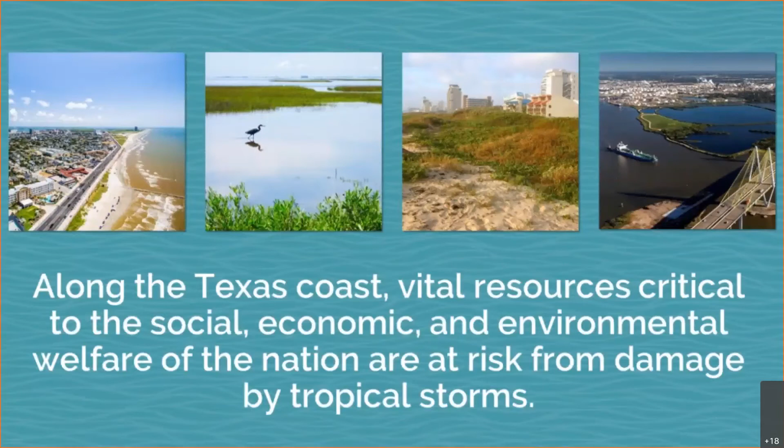Along the Texas coast, vital resources critical to the social, economic, and environmental welfare of the nation are at risk from damage by tropical storms. When tropical disturbances negatively impact the Texas coast, the immediate fallout and the continued aftermath affects not only the people who live in these coastal counties, but also the entire nation. It is critical that we take action now to avoid the destruction that future storms will bring.

That's exactly why the U.S. Army Corps of Engineers has partnered with the Texas General Land Office to identify and recommend feasible projects to reduce risks to public health and the economy, restore critical ecosystems, and to make the Texas coastline more resilient.

The Coastal Texas Study was initiated in 2014 to evaluate large-scale coastal storm risk management and ecosystem restoration actions aimed at providing the coastal communities of Texas with multiple lines of defense from a wide array of coastal hazards. This study falls under the USACE's Civil Works mission, which includes, but is not limited to, inland and coastal flood risk management and restoration, protection, and management of aquatic ecosystems.

The study area consists of the entire Texas Gulf Coast, from the mouth of the Sabine River to the mouth of the Rio Grande, and includes the Gulf and tidal waters, barrier islands, estuaries, coastal wetlands, rivers and streams, and adjacent areas that together make up what we refer to as the Texas coast.

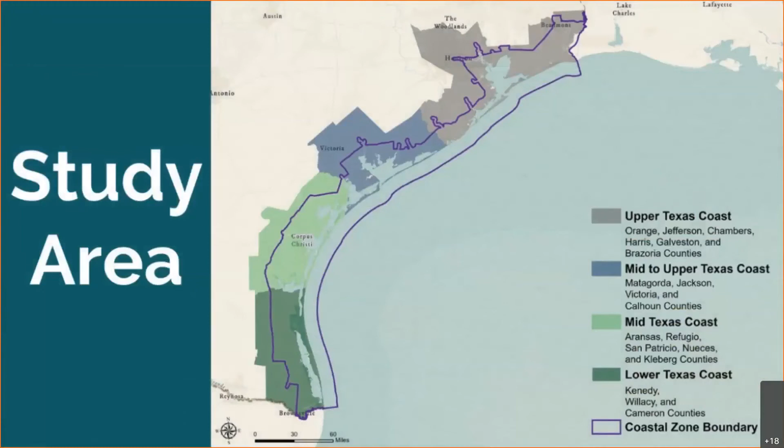In November 2015, the U.S. Army Corps of Engineers entered into an agreement to officially designate the Texas General Land Office as the non-federal sponsor and begin development of a feasibility study and environmental impact statement. The Coastal Texas Study Team was officially formed, comprising the U.S. Army Corps of Engineers and the Texas General Land Office. The study phase, or the phase in which we determine the best course of action to protect the Texas coast, includes a series of reports that explain the findings of the study and a proposed plan of action.

In fall 2018, the study team released the first draft report and the draft environmental impact statement. Based on the input received during the public review and comment period in late 2018 into early 2019, the study team began revising the draft proposal to integrate public comments and feedback. As this second draft proposal was formulated, the study team continued to seek further public input through the establishment of 4 community working groups led by the GLO, as well as a number of targeted stakeholder meetings. In addition, 3 public open houses were held in February 2020 across the Upper Coast to help inform the public.

The study team will continue to review and address the input received from the public and resource agencies to produce the final feasibility report and environmental impact statement, which is anticipated to be published in May of 2021. The final report will be signed by the Chief of the Corps of Engineers in June 2021, which will mark the end of the study phase.

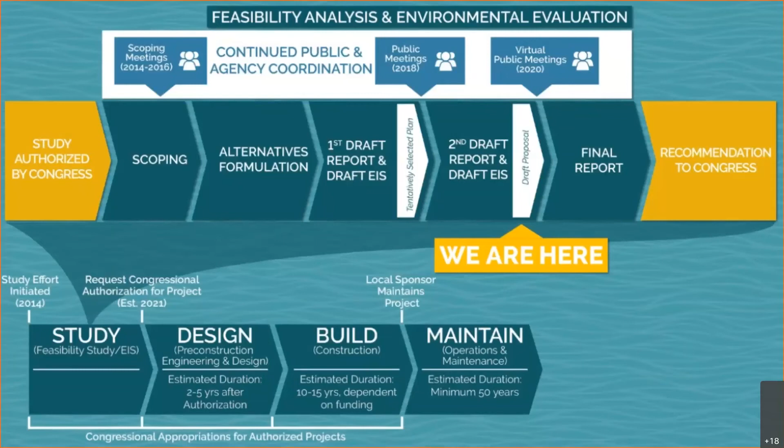After the study phase, the recommended plan will be proposed for congressional authorization and funding. If approved and funded by Congress, the recommended plan would then be designed and constructed over a period of 12 to 20 years, depending on congressional authorization, appropriations, and non-federal partnerships. The project would be maintained after construction by a local sponsor or sponsors who have not yet been determined.

To comply with the National Environmental Policy Act, or NEPA, a federal agency must prepare an environmental impact statement if it is proposing actions that may significantly affect the quality of the natural and human environment. The NEPA environmental review process seeks to facilitate better informed decisions focused on avoiding, minimizing, and/or mitigating potentially negative impacts

of federal action. For the Coastal Texas study, the U.S. Army Corps of Engineers is following a tiered NEPA process. The final EIS will be published with the final feasibility report in 2021, and supplemental NEPA compliance documents will be prepared and published for public review as the project is designed. This means that the public will have additional opportunities to engage with the team, review revised plans, and provide feedback.

In accordance with U.S. Army Corps of Engineers planning guidelines and NEPA requirements, a proactive approach was taken to engage the public, resource agencies, industry, local governments, and other interested parties throughout the Coastal Texas study planning process. This included regular and continued coordination over the study period. Starting in 2014, during the reconnaissance phase, a series of scoping meetings were held. And now a series of virtual public meetings are being held to review and finalize the second draft proposal and

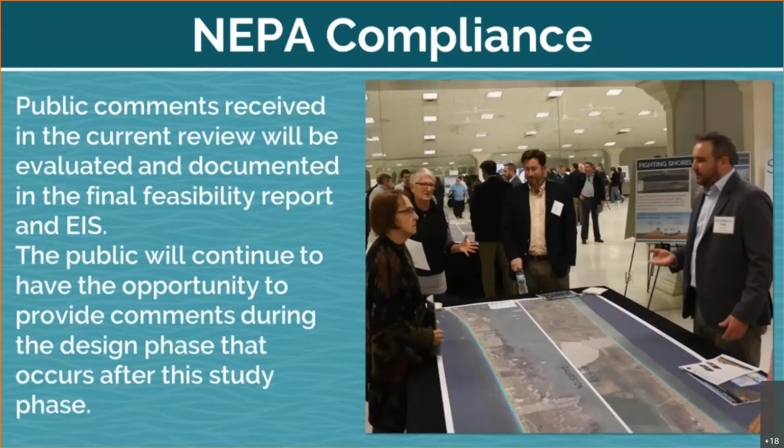The Texas coast is vulnerable to tropical storms and hurricanes that can take human lives, flood homes and businesses, and damage coastal ecosystems. The damages from hurricanes and tropical storms could become more severe as storm surge is projected to increase with higher sea levels and rising ocean temperatures. When tropical disturbances negatively impact the Texas coast, they affect not only the people who live in these coastal counties, but the entire nation. The Texas coast is an economic engine, home to ports, oil and gas refineries, corporate headquarters, military bases, fuel supply and refinery complexes, and numerous other enterprises.

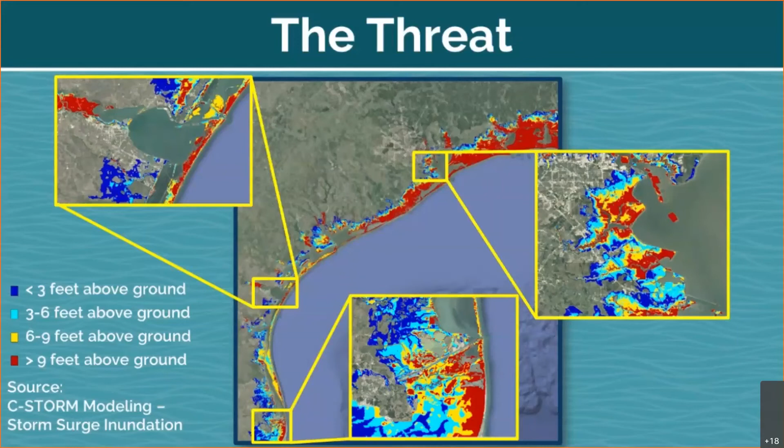The shutdown of even a single Texas port can impact state and national economies for a significant period of time, as experienced in 2008, when Hurricane Ike's storm surge and heavy winds significantly impacted Brazoria, Chambers, Galveston, Harris, Jefferson, and Orange counties.

The Coastal Texas Study Team recognizes that the natural physical features and processes are interconnected with the man-made features within the coastal Texas region. Population and industry grew in this region specifically because these features supported economic growth. However, erosion and storm surge reduced the protection these barrier systems provide to the coast. Relative sea level change increases the vulnerability of these systems even further. Risk reduction measures designed to sustain natural features and reduce inundation and erosion risks can be achieved at lower cost when implemented before conditions deteriorate further.

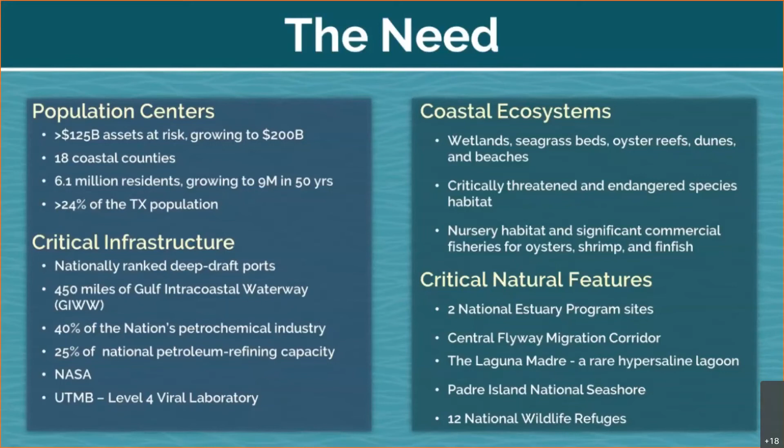After the first draft proposal was released in October of 2018 for public comment, policy review, and agency technical review, multiple changes were considered and developed to reduce impacts and costs of the revised plan. Most significantly, the plan no longer includes the originally proposed levee floodwall segments that would have paralleled State Highway 87 on Bolivar Peninsula and FM 3005 on Galveston Island. These segments were dropped from the plan to minimize both social and environmental impacts. Instead, the draft proposal now includes the Bolivar and West Galveston Beach and Dune system, a double dune system designed to provide both storm surge risk reduction and ecosystem restoration benefits.

Among other changes at the Bolivar Roads crossing, a second 60-foot deep navigation channel and two 650-foot wide draft sector gates are now proposed instead of a 1,200-foot wide gate. The estimated refinements of the Bolivar Roads gate system have reduced the constriction of flow between the bay and Gulf down from 27.5% to 7 to 10%. This, in turn, has reduced the anticipated environmental impacts to the Galveston Bay's ecosystems and has reduced the amount of mitigation now necessary to offset losses.

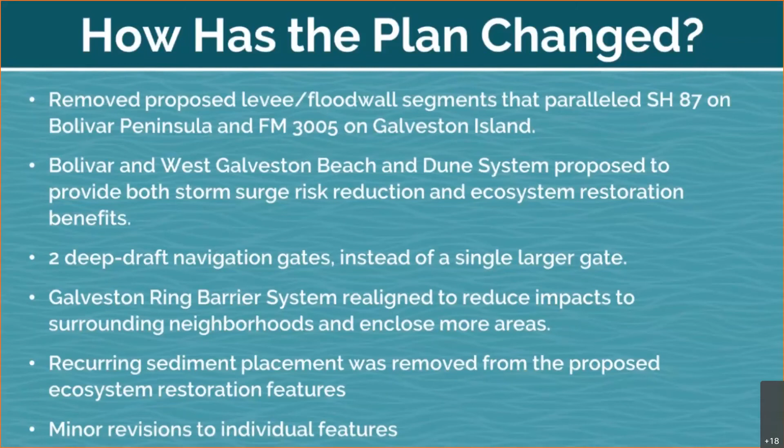This time, we've developed a broader, more holistic solution that combines man-made solutions with coastal restoration projects that work together to protect the coast. This comprehensive approach is referred to as a multiple lines of defense strategy and can be divided into three categories. The Gulf line of defense to keep storm surge in the Gulf, which includes the Bolivar Roads storm surge gate system, which has been designed to prevent approximately 60% of storm surge from entering Galveston Bay, highlighting the need to implement the gate system prior to the remaining proposed features.

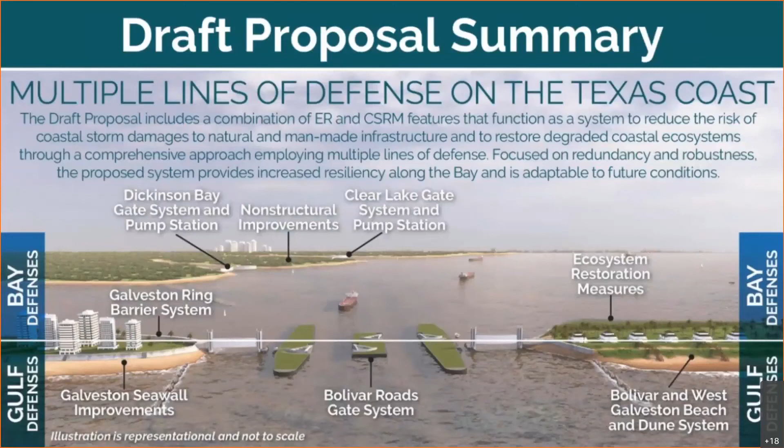The Bay line of defense to manage water that is already in the bay and any additional storm surge that overtops the Gulf line of defense, and ecosystem restoration to enhance coastal resilience into the future. The proposed plan provides increased resiliency along the coast and is adaptable to future conditions, including relative sea level change.

As we mentioned, the Gulf defense now includes a gate system across the Bolivar Roads inlet and 43 miles of beach and dune systems on the front of the peninsula and the island, as well as 2.9 miles of beach and dune structure down on South Padre Island. The Bay defense includes a 15-mile ring barrier around the backside of Galveston Island and mainland defenses including gates and stations at Dickinson Bay, Clear Lake, as well as non-structural measures on the west side of Galveston Bay. And the ecosystem restoration proposal includes 8 separate sites totaling over 6,600 acres of habitat restoration coast-wide.

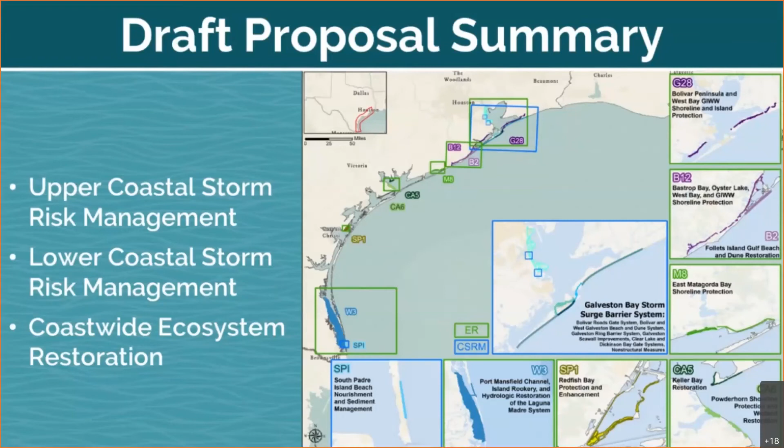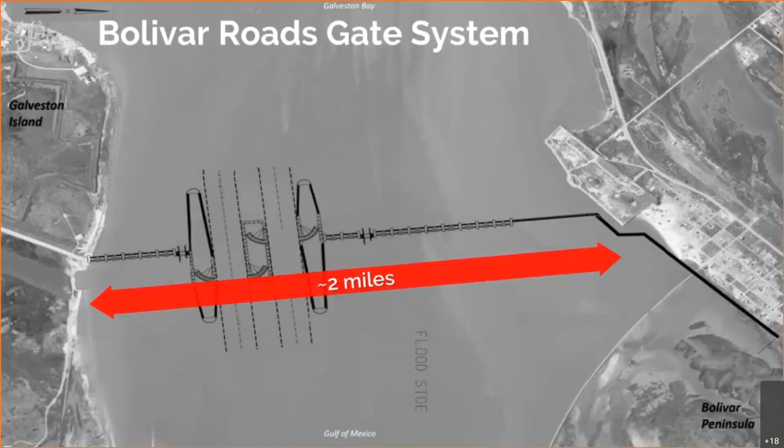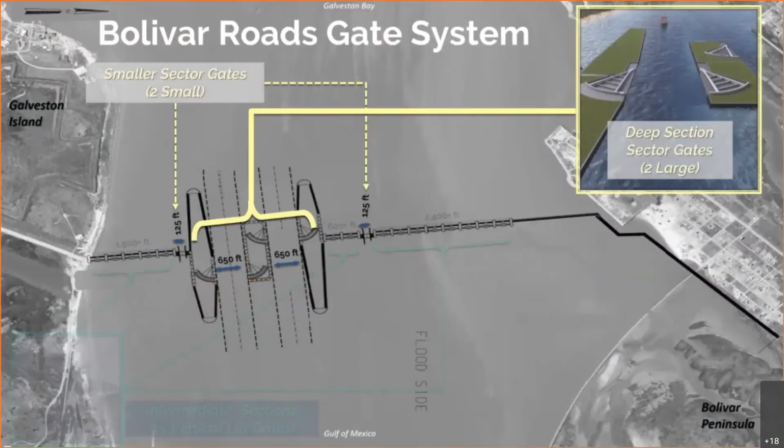The study team hosted an international storm surge gate design workshop with experts from around the world to evaluate the previously proposed gate design and suggested changes to improve safety, assure redundancy, and reduce environmental impacts. The Bolivar Roads gate system represents the most critical feature of the Gulf line of defense and now includes two 650-foot wide floating sector gates, two 125-foot wide floating sector gates, 15 300-foot wide vertical lift gates, 16 shallow water environmental gate complexes that are 16 feet by 16 feet, and tie-in structures comprising of flood walls and levees will join the gate system to the beach and dune system.

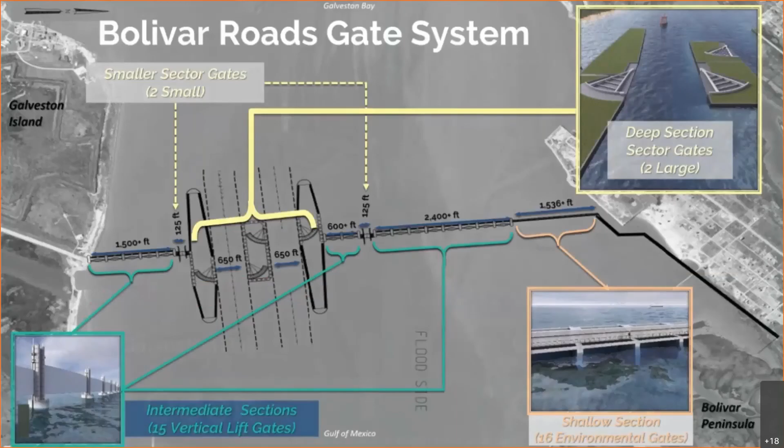The deep draft navigation sector gates across Bolivar Roads inlet will be anchored and housed in man-made islands on both sides of the existing and new channels. The gates will be stored in dry docks within the man-made islands, which will help minimize the probability of vessel impacts during day-to-day activities. As a storm approaches and a decision is made to deploy the gates, the dry docks will be flooded, allowing the gates to swing out and float into place. Then water will be pumped into the arms, sinking them into place. Once the storm surge event has passed, the water will be pumped out of the gates and they will be floated back into their dry docks on the artificial islands.

The deep draft navigation gate openings will require dredging a second deep draft channel and are designed to be 650 feet wide each, with a sill depth of 60 feet. The sill depth across the ship channel will allow for future deepening of the Houston ship channel, which is currently maintained at a depth of minus 48 feet mean lower low water. The gates will remain open year-round to maintain continuous navigation traffic. The gates will only be closed when a storm surge event threatens the Texas coast or for an annual maintenance check and inspection.

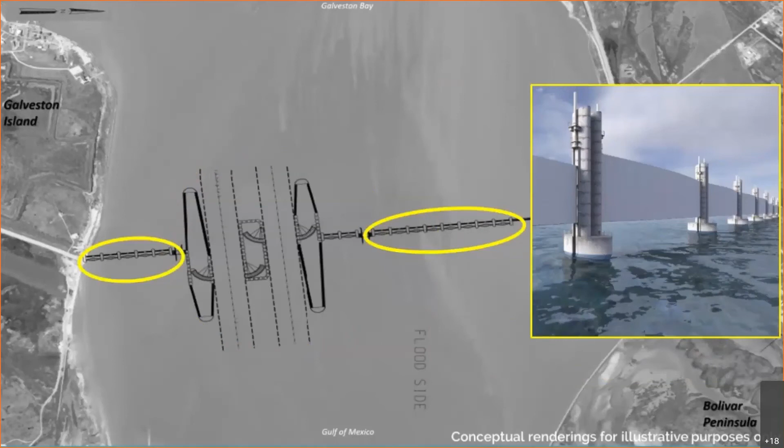Smaller 125-foot sector gates will be located on each side of the larger 650-foot sector gates for other vessels to travel through the storm surge gate system without crossing paths with the deep draft vessels. These sector gate complexes will have a reinforced concrete pile foundation with steel fabricated gates. When the gates are open, they are stored on the islands to protect them. The channel crossing continues with a series of vertical lift gates suspended between concrete towers. The lift gates for the Bolivar Roads crossing have 300-foot wide openings, including 8 lift gates with a 20-foot sill depth and 7 lift gates with a 40-foot sill depth.

To the right or north of the vertical lift gates, we propose to build 16 shallow water environmental gates in the area nearest Bolivar Peninsula, where the water is 5 feet deep or less. These gated structures provide multiple openings to allow for tidal passages from both sides of the gates. The gates will require an access road on the bay side of the structure to allow maintenance crews access to the gates and operating equipment.

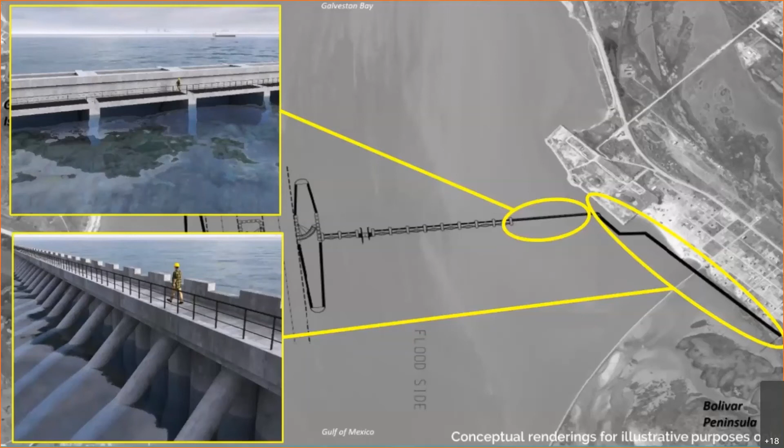The road will consist of stainless steel industrial grating, which will allow sunlight to pass through the water below, which reduces impact to marine life. To tie the gated structures to the land, a 5,300-foot-long combi wall will join the system to the levee system at the end.

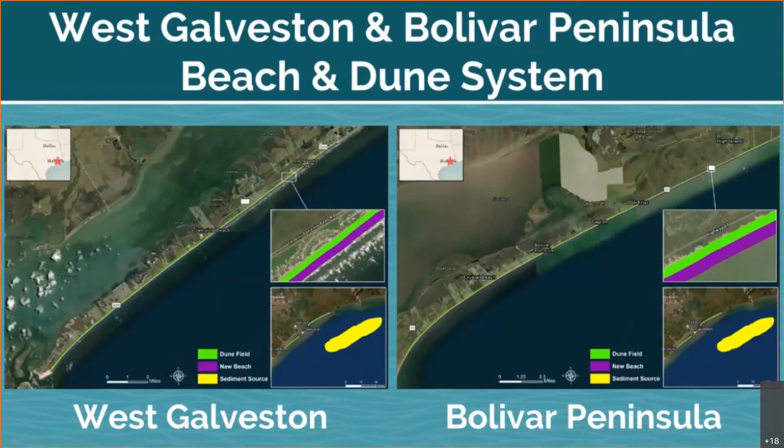Beach and dune construction on West Galveston Island and Bolivar Peninsula form the remainder of the Gulf defenses. On West Galveston Island, this feature would tie into the existing Galveston seawall and continue westerly for 18 miles, ending at San Luis Pass. On Bolivar Peninsula, the beach and dunes tie into the McFaddin National Wildlife Refuge Beach Ridge Restoration Project, which starts approximately 2 miles east of Highway 87 and continues southwest for 25 miles to the end of Biscayne Beach Road, where it links into the gates levee feature.

Although the improved beach and dune designs provide a lower level of risk reduction than the previously proposed levee system, they take advantage of the natural resiliency of sand systems, sustain the barrier island over time, and strengthen the tie-in to the Bolivar Roads gate system. These changes have been made in response to public comments and represent a solution which minimizes environmental and social impacts while still achieving significant coastal risk reduction.

The proposed beach and dune features include a 14-foot landward dune and a 12-foot gulfward dune with a 250-foot wide beach system on the water side. It is important to note that this dune field construction will begin at the current dune line and build out toward the water rather than building toward people's residences.

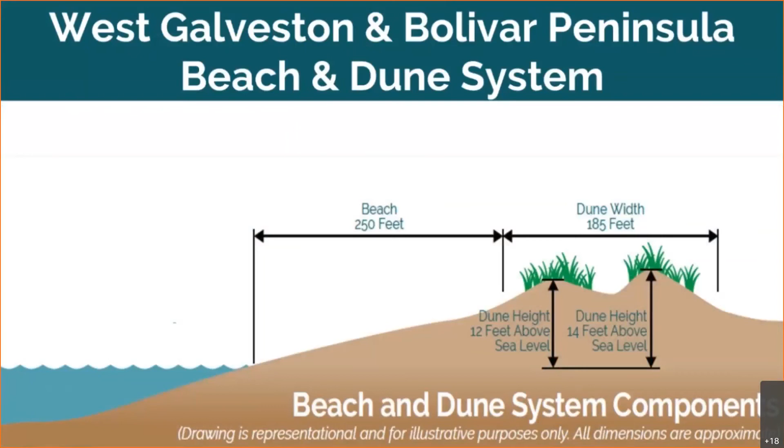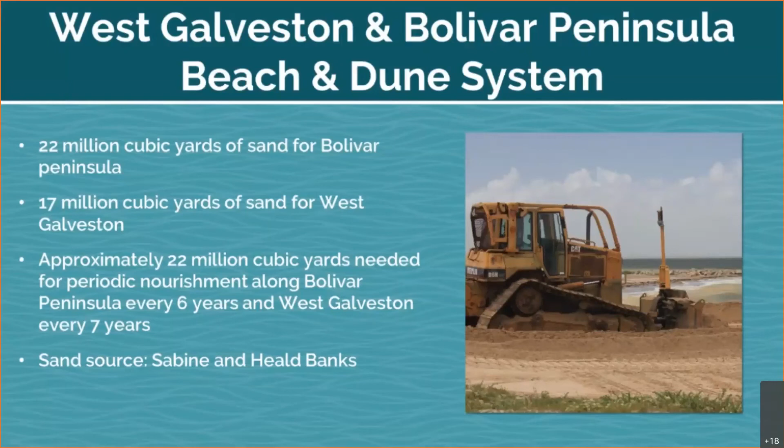The draft proposal will require approximately 22 million cubic yards of sand for initial beach and dune construction along Bolivar Peninsula, and approximately 17 million cubic yards of sand for initial beach and dune construction along West Galveston, and approximately 22 million cubic yards of material will be needed for periodic nourishment along Bolivar Peninsula and West Galveston, every 6 years for Bolivar and every 7 years for West Galveston over a 50-year period of analysis, considering the intermediate relative sea level change condition.

Currently, there are 125 authorized beach access points, 67 vehicle crossings, and 58 pedestrian crossings within the proposed beach and dune systems. Existing authorized pedestrian beach access crossings will be replaced with dune walkovers to minimize impacts from the newly created dune systems. Pedestrian traffic volume will be investigated to determine an appropriate walkover width for the location, and all up and down ramps for the crossovers would be designed to be ADA compliant.

Existing authorized pedestrian beach access crossings will be replaced with dune walkovers to minimize impacts from the newly created dune systems. Vehicular ramps will be created to minimize ramp length. The number of access points will be in compliance with the Texas Open Beaches Act.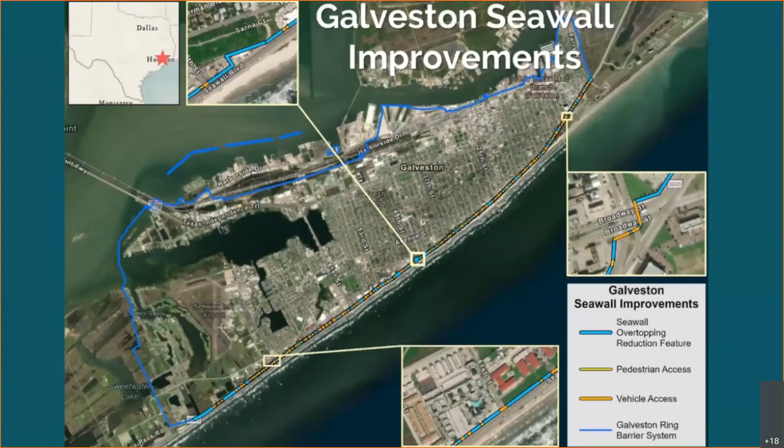The Galveston Bay is a large enough body of water that flooding can result from wind and fetch pushing water up onto Galveston Island from the backside. The Galveston Ring Barrier offers the first component of the bay defenses to address this risk.

The system ties into the existing seawall and proceeds clockwise from the west end of the seawall north in the proximity of 103rd Street to Offatts Bayou, crosses the Teichman Point area, and ties into Interstate Highway 45, continues east along the Harborside area to the 47th Street area, then continues north to the Galveston Ship Channel, then continues east through the Port of Galveston to the University of Texas Medical Branch, turns northward to the ferry, and then back south to the seawall. Numerous trade-offs between project cost, project impacts, and overall effectiveness of the ring barrier system were evaluated and made during the refinement of the alignment.

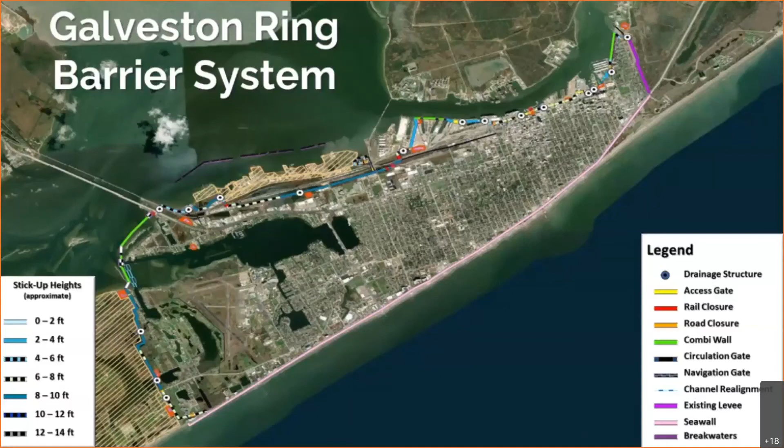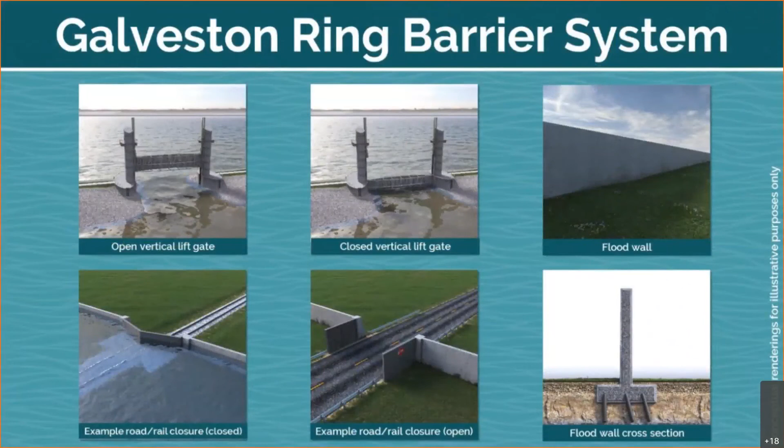The ring's floodwalls and gates have been set at an elevation of 14 feet, which considers the water level of the bay and wave overtopping, assuming that the Bolivar Roads gate system has been constructed in advance of a storm.

Since Galveston Island currently operates on a gravity drainage system, the plan would add a forced drainage system consisting of approximately 6 new pump stations to move water off the island. The pump stations would address storm surge flooding as well as rainfall flooding during storm events. Further, any features proposed by the study are not permitted to worsen any existing conditions, meaning the risk of flooding from a rain event cannot be increased with the implementation of the ring barrier system.

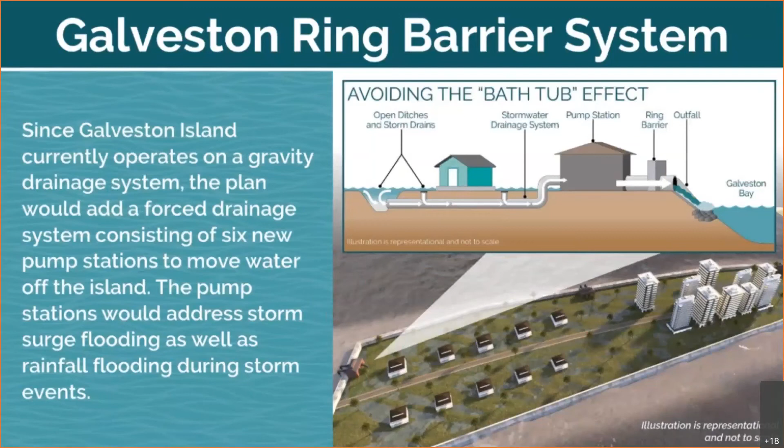Although the Bolivar Roads gate system reduces the storm surge water of the Gulf from entering Galveston Bay, residual risk exists due to the storms pushing the Galveston Bay waters onto the mainland. The Clear Lake and Dickinson Bay systems are proposed as a second line of defense to address this concern. The Clear Lake and Dickinson Bay gate systems each consist of a storm surge gate structure, associated flood walls, and a pump station to address the residual risk that persists in the Clear Lake and Dickinson Bayou areas.

For Clear Lake, a closure is proposed at State Highway 146 in Clear Lake to address Galveston Bay surge. The design includes a 75-foot sector gate and a pump station with a design capacity of 20,000 cubic feet per second. The flood wall and closure structure would start on the west side of State Highway 146 near NASA Road 1 and end on the south side of the outlet near Marina Bay Drive west of State Highway 146.

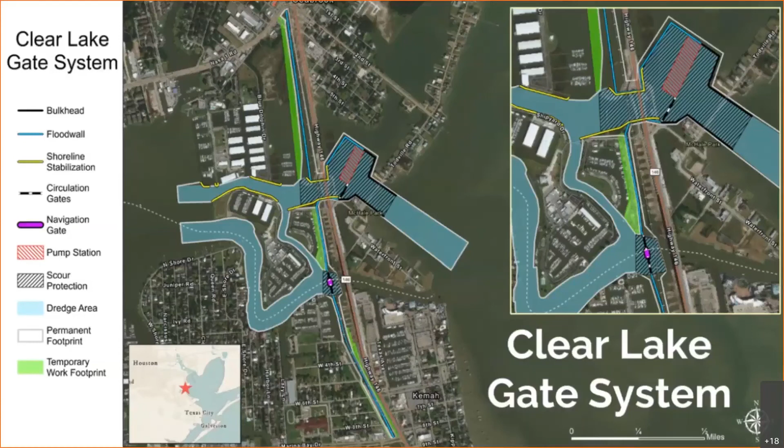For Dickinson Bay, a closure is proposed at State Highway 146 and Dickinson Bayou to address Galveston Bay surge. The design includes a 100-foot sector gate with a design capacity of 19,500 cubic feet per second. The flood wall and closure structure would start on the west side of State Highway 146 near Avenue T and end on the south side of the bayou near Waterman's Harbor west of State Highway 146. These features would include drainage outlet structures, also called circulation gates, to allow hydraulic connectivity to be maintained except during closure for hurricane or tropical storm surge events.

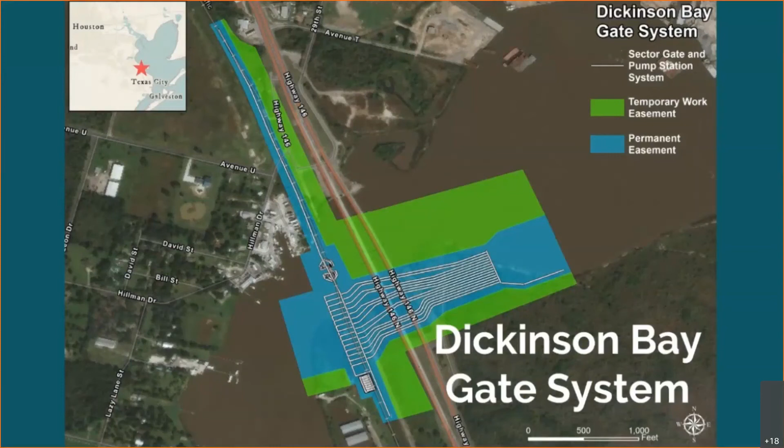Non-structural measures are proposed for the west side of Galveston Bay, north of the Texas City Hurricane Protection Levees. Non-structural measures include raising houses and/or floodproofing. The study team reviewed residential and non-residential structures within the Galveston Bay system that are predicted to sustain significant damage during a variety of storm surge flood events under the future with project condition with the surge barrier in place. Based on an evaluation of cost and benefits and the ability to continue to buy down risk, structures still receiving damages in the 100-year storm surge event were recommended for voluntary non-structural raisings.

About 1,750 residential pier and slab-on-grade homes are being recommended to be raised to the future with project 100-year stage plus 1 foot, and 170 non-residential slab foundation buildings are recommended to be floodproofed to 3 feet above the existing ground elevation. If local floodplain standards are higher than these recommended elevations, the local standard should be followed.

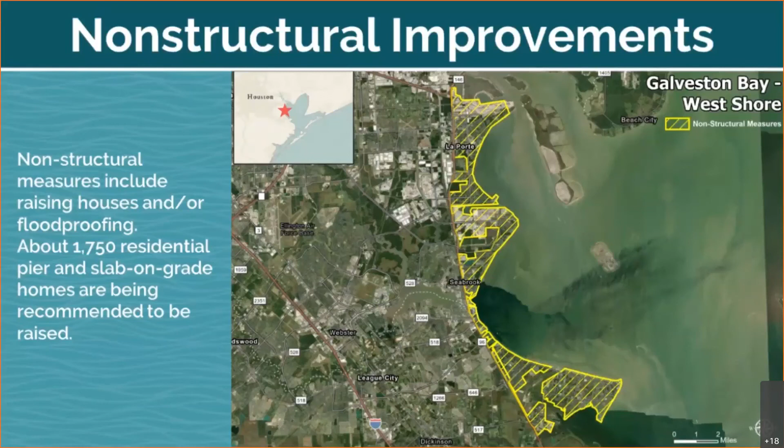The Coast-Wide Ecosystem Restoration Plan was formulated to restore degraded ecosystems that buffer communities and industry on the Texas coast from erosion, sinking land, and storm losses. Ecosystem restoration projects address habitat loss and degradation from coastal processes and support the coastal storm risk management components by providing a natural buffer from coastal storms. Each ecosystem restoration measure represents a combination of features and is formulated in a specific geographic location to restore diverse habitats and provide multiple lines of defense.

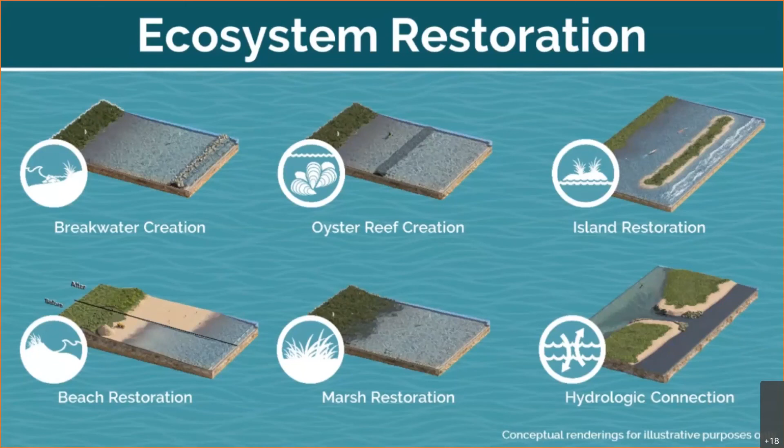A total of 8 ecosystem restoration measures are proposed along the entire Texas coast that collectively provide approximately 6,610 acres of ecosystem restoration. Ecosystem restoration measures included in the draft proposal include 114 miles of breakwaters, 15.2 miles of bird rookery islands, 2,052 acres of marsh, 12.3 miles of oyster reef, and 19.5 miles of beach and dune. Here, you can see the proposed measures for Galveston Gulf Intracoastal Waterway shoreline and island protection.

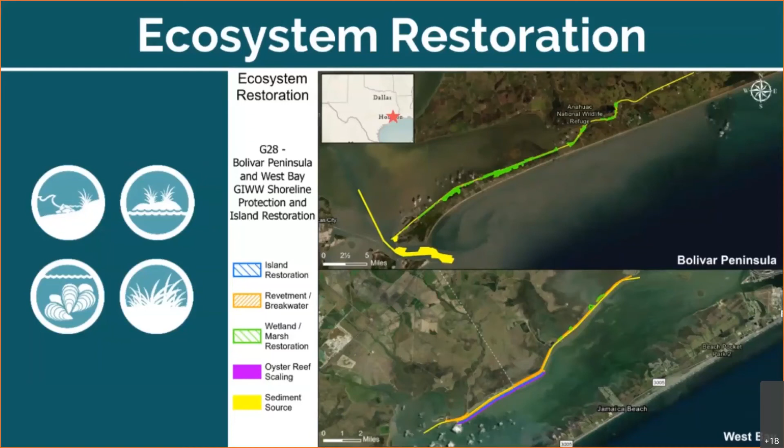Here, you can see the proposed measures for Bolivar Peninsula and West Bay Gulf Intracoastal Waterway shoreline protection and island restoration. You can also see proposed measures for Follett's Island, Gulf Beach, and Dune restoration.

Here, you can see the proposed measures for East Matagorda Bay shoreline protection and Keller Bay restoration. Oyster reefs, revetment, and breakwaters will reduce erosion along the shorelines, and sediment will be used to restore marshes, wetlands, and islands.

Here, you can see the proposed measures for Powderhorn shoreline protection and wetland restoration, and Redfish Bay protection and enhancement. Again, offshore breakwaters and oyster reefs will reduce erosion of the shorelines, and sediment will be used to restore marshes, wetlands, and islands.

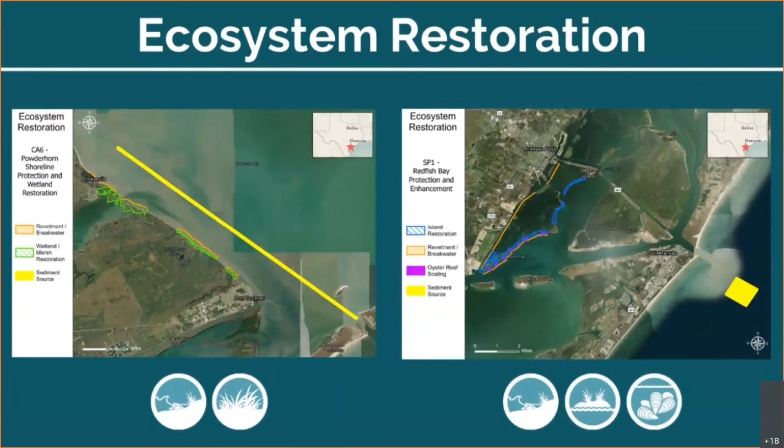Finally, here are the proposed measures for Port Mansfield Channel, island rookery, and hydrologic restoration of the Laguna Madre. Sediment will be dredged from the channel and placed on the beach in Mansfield Island, a bird rookery island. The opened channel will restore the connection between the Gulf and the lagoon.

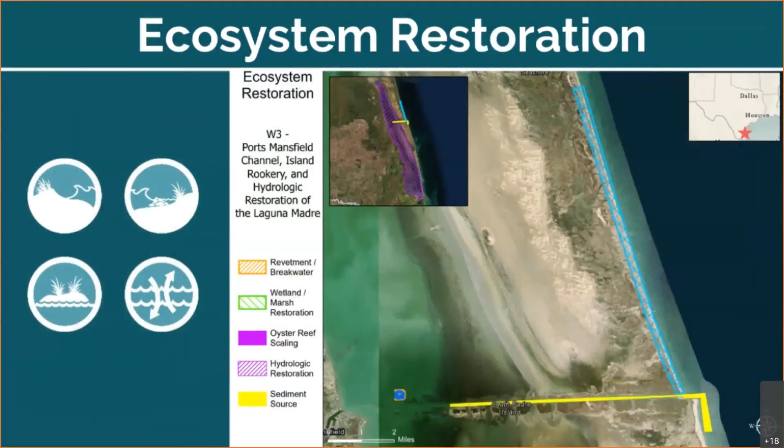While the team was able to minimize and avoid many potential impacts by optimizing the proposed lands, an estimated 1,577.6 acres of direct and indirect impacts to wetlands, bay bottom, and oyster reefs are still anticipated under the draft proposal. The impacts are divided into two categories, direct and indirect. Direct impacts are caused by the footprint of coastal storm risk management feature construction, and indirect impacts are caused by construction-induced changes to the environment that are not within the direct footprint.

A draft mitigation plan has been developed to address the potential lost functions and values of the impacted areas through the creation or restoration of habitats in the area. Over 677 acres of habitat will be created, and an additional 674.4 acres of existing low-quality habitat will be enhanced to offset potential direct and indirect impacts to wetland and oyster reefs under the draft proposal.

Potential locations for mitigation sites have been developed by the study team, but will be refined further during the pre-construction engineering and design phase. Ultimately, the final size of the mitigation measures may change. However, due to the conservative nature of engineering and economic assumptions used in the development of the draft proposal, it is anticipated that design refinements of the proposed structures will result in equal or lesser environmental impacts than currently estimated.

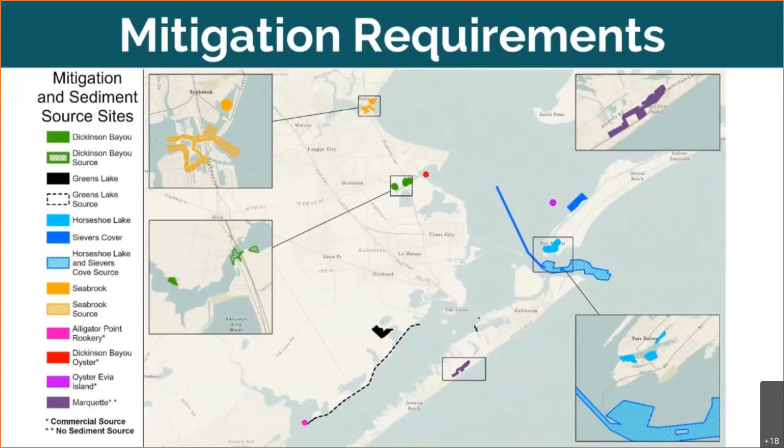For the overall combined project, the project construction cost is estimated at $26.2 billion, with 67% of the cost allocated for Gulf defenses, 23% for bay defenses, and 10% for ecosystem restoration. As you may notice, the total economic recovery costs from previous storms indicate that the proposed project could very well pay for itself in just one storm.

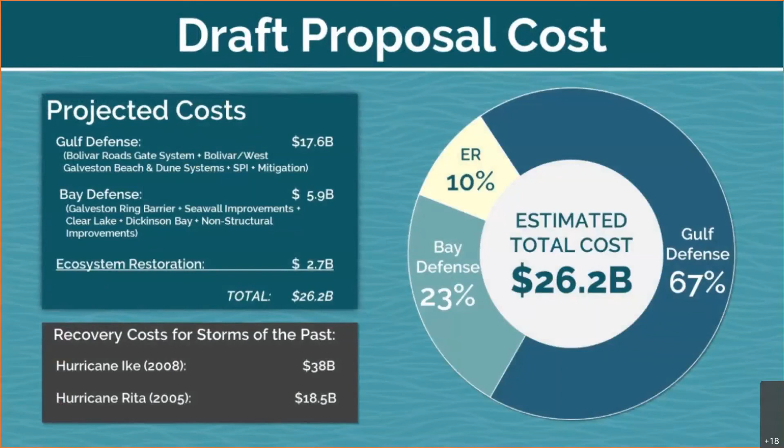With the draft proposal in place, not all storm damages will be prevented, only reduced. It is important to understand that the project will not eliminate all risks to life and property. Even with primary line of Gulf defenses and secondary line bay defenses, residual damages can still occur from project exceedance events, rainfall events, and hurricane winds and wind-blown debris.

Implementing the coast-wide ecosystem restoration plan would result in positive effects on natural resources which are institutionally, technically, and publicly recognized. Restoration supports the global, national, state, and locally significant resources within the area and the unique services, functions, and values provided by these resources. Fresh, intermediate, brackish, and saline marshes will be protected or enhanced within a framework of marsh restoration, shoreline protection stabilization, and dune beach features that interact to provide benefits greater than their costs.

Together, these features would help protect against erosion and provide important transitional estuarine habitat between upland and marine environments. Restoring lost wetlands, protecting existing wetlands, and reducing the profound environmental and habitat loss across the study area could also help support the coastal storm risk management portions of the recommendations.

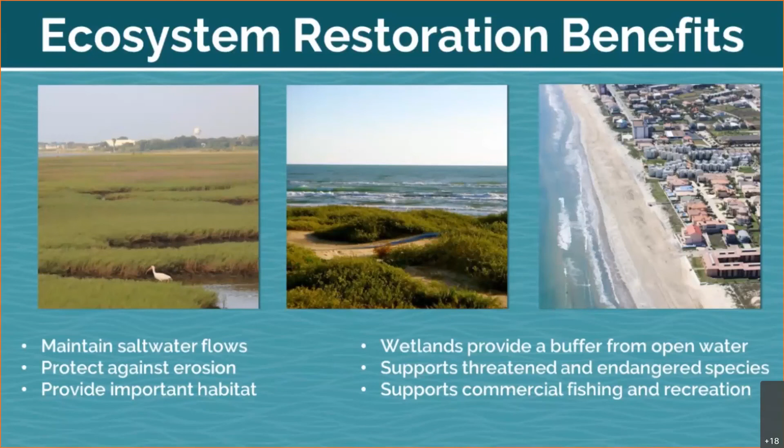Implementing the Galveston Bay Storm Surge Barrier System to reduce financial damages from hurricane storm surge in the study area serves multiple purposes. First, it would help lessen the financial and social impacts that tropical storms and hurricanes can cause by reducing the risk of property damage that displaces residents, shuts down commercial and industrial services, and disrupts livelihoods. If structures avoid or experience less damage because of the draft proposal, families and businesses can rebound much more quickly

after a tropical event. Second, time, money, and energy would not be lost to repairing structures damaged by storm surge, relocating to other areas due to displacement from a home or business, or disruptions in community cohesiveness. The draft proposal would also help to ensure that the economy and the region's critical infrastructure would continue to operate after a storm, and the stress and hardship associated with a hurricane storm surge would be decreased.

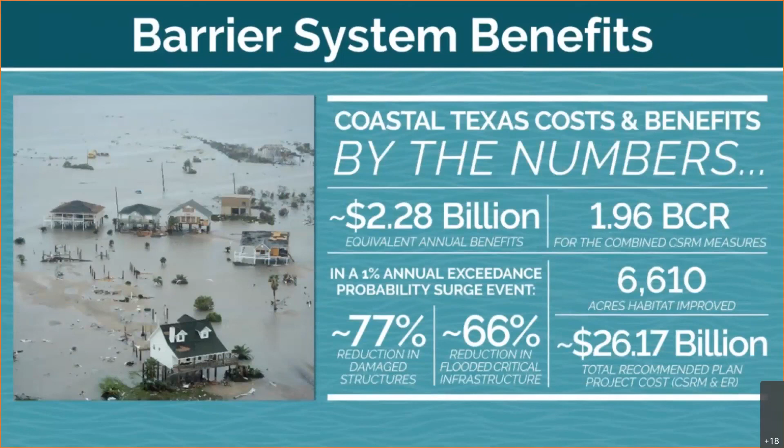And most critically, if damages from storms were distributed equally across all 50 years of the study, the Galveston Bay Storm Surge Barrier System is anticipated to reduce average annual damages by $2.28 billion per year. That concludes the presentation portion of today's meeting.

We will now begin the commenting period. As a reminder, if you have not registered to speak during the meeting today and would like to, you may do so at any time by using the Raise Hand feature located at the bottom of the WebEx participant list, or dialing *3 if you are joining us only by phone. Due to the nature of today's virtual meeting, the formal public commenting portion of today's meeting will be conducted in the following way. First, federal, state, and local elected officials who wish to speak will be called on to do so. Then, anyone else who has indicated a desire to speak will be given the same opportunity.

We will then call on each member of the public who has signed up to speak by the name used during the meeting registration or by the last 4 digits of your phone number if you are only joining us by phone. Each speaker will be given 2 minutes to make their comments. A countdown timer will be displayed on the meeting broadcast screen for each speaker to indicate the remaining time. As your time ends, please be courteous to the other members of the public who wish to provide comments and quickly wrap up your comments to ensure that everyone who would like to speak has the opportunity to do so.

If you do not need the entire time allotted, help us to include everybody by only using the time you need. If you complete your comments in less than 2 minutes, we will restart the clock for the next speaker. Remaining time cannot be reserved or transferred to another speaker. Please keep in mind that we reserve the right to mute your microphone if this instruction is not followed. We ask that you support us in conducting a respectful, orderly, and courteous meeting. We want to be sure we get all your comments recorded, and we need your cooperation to do so.